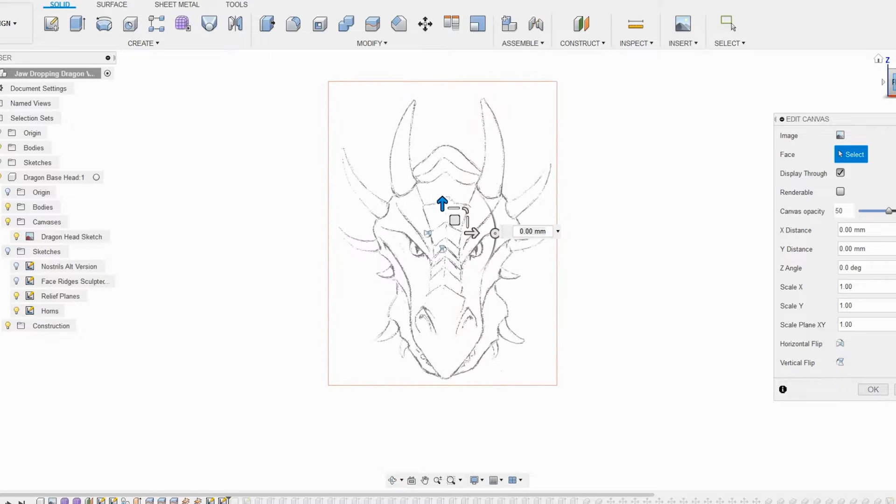First step in Fusion 360 is to import a scanned image. The sketch I created has been placed in the background, and then I can create the sketched lines on top of that. I'm going to be working with meshes, and here you can move around the points, the lines, the faces. I started out with a sphere for the face and just eyeballed the size, since everything can be adjusted from the initial body that's created.

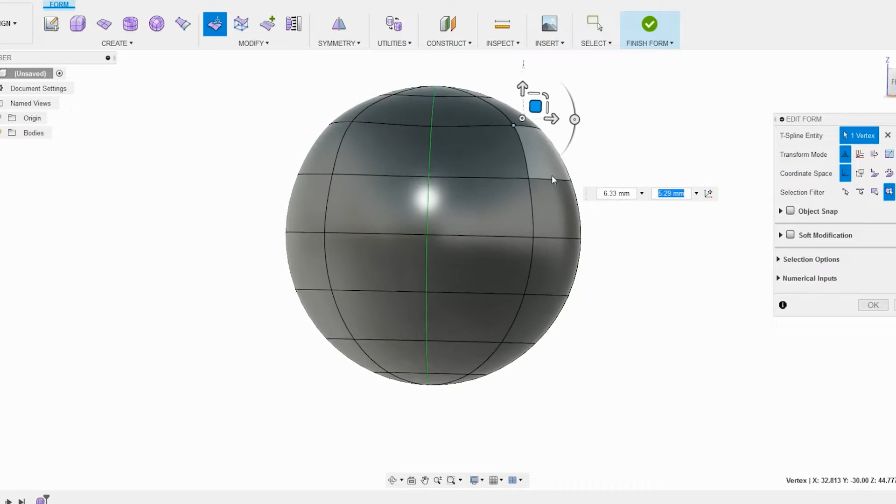For this I definitely turned on symmetry so I could work on both sides of the face at the same time. Ultimately I'm going to slice it in half and only use one of the halves, but it's easier to see how things are looking as you go if both sides of the face are being created at the same time.

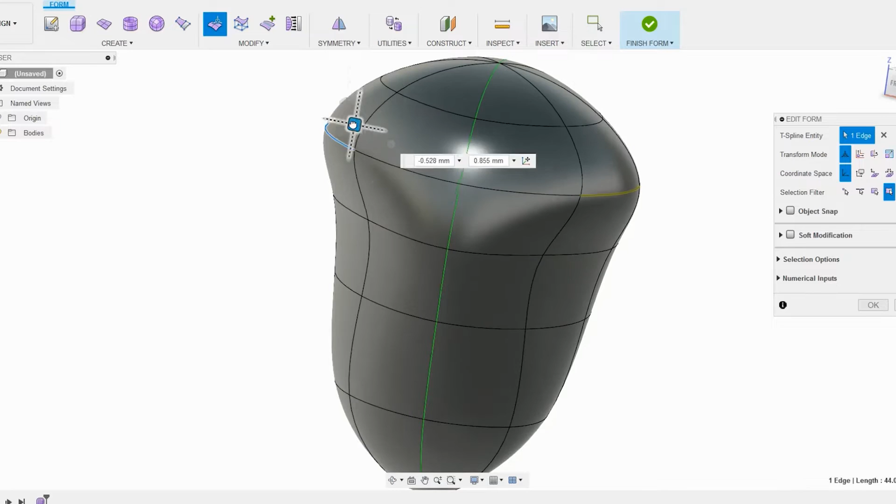It was just a lot of playing around with this, moving these around to try and get a shape that looked like it would work well for the dragon, and I did make changes to this quite a bit throughout the process as I was creating the slices that became the final face.

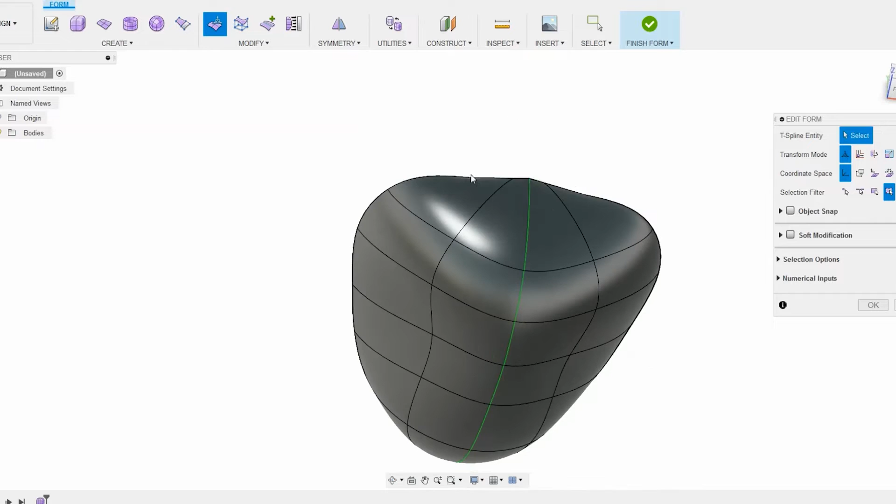I also sliced off the back of the sphere, so instead of working on the whole round object, I'm just working on a single face that contours around the front of the face. This is what my two surfaces ended up looking like approximately for the face and the jaw out of the form workspace, although I did go back and edit those multiple times.

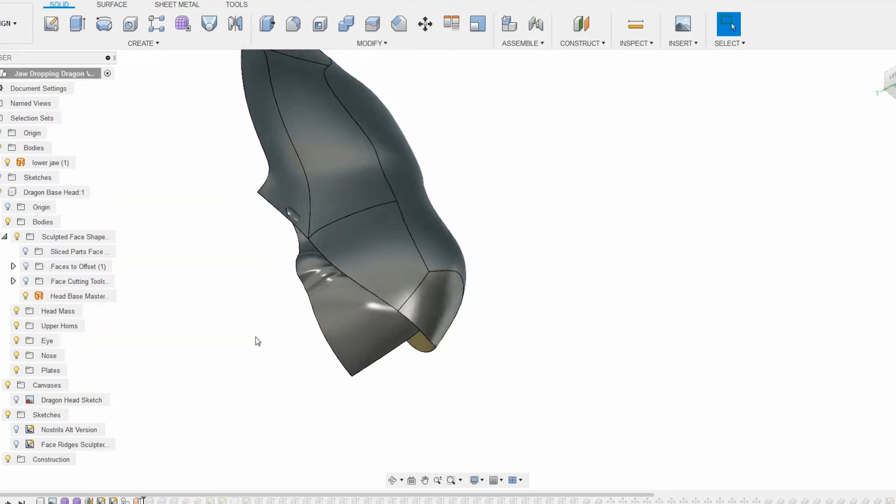Before we get too far, let's take a step back, because there are really three main processes that I used throughout this project. I think if we look at each of those individually, it will make more sense in the project as a whole. So the first method is sculpt and trim.

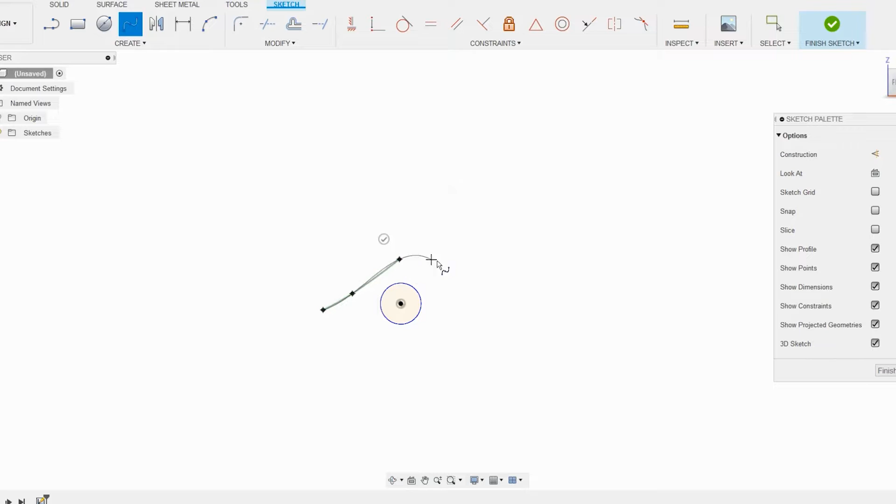This is what I used for the face and the jaw primarily. I'm going to go through a super simple sample project here so it's easier to see exactly what's going on. First, I'm going to create a sketch, and I'm just making a shape that's sort of an eye.

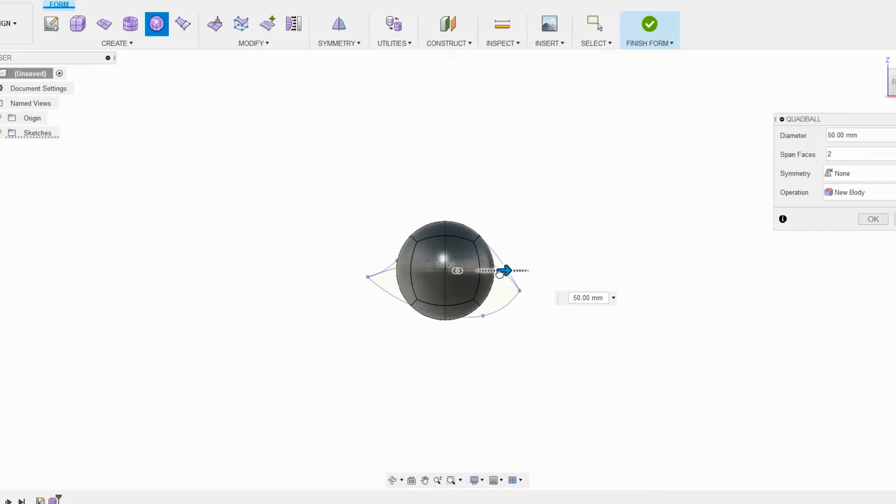It's just a sample here, but we want to have a couple of different parts that would be individual bodies, so we can create different levels from those using our sculpted form. I'm going to jump now into the form space, starting out with a sphere, and I'm just going to adjust that around until it covers my sketch, so my edges overlap somewhat.

And this is quite flexible. You can grab individual points, you can grab lines or the full edge that wraps around the shape, and you can also just grab it by a face and move it in any direction that you need.

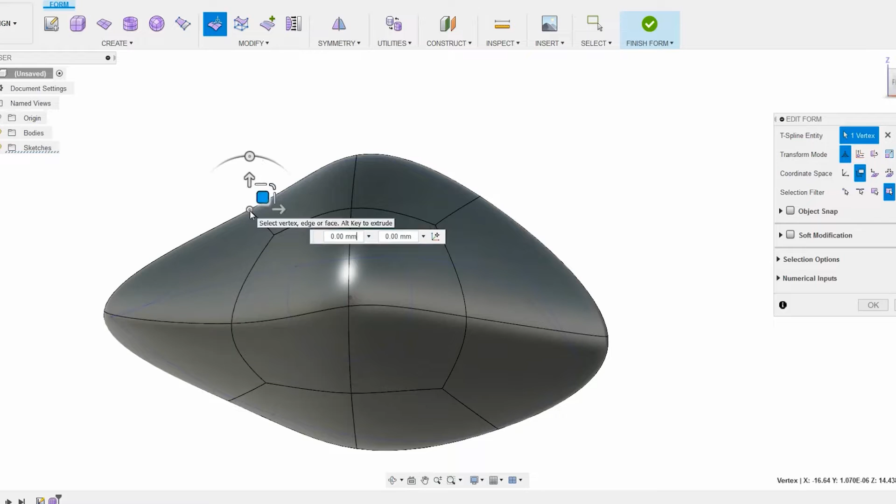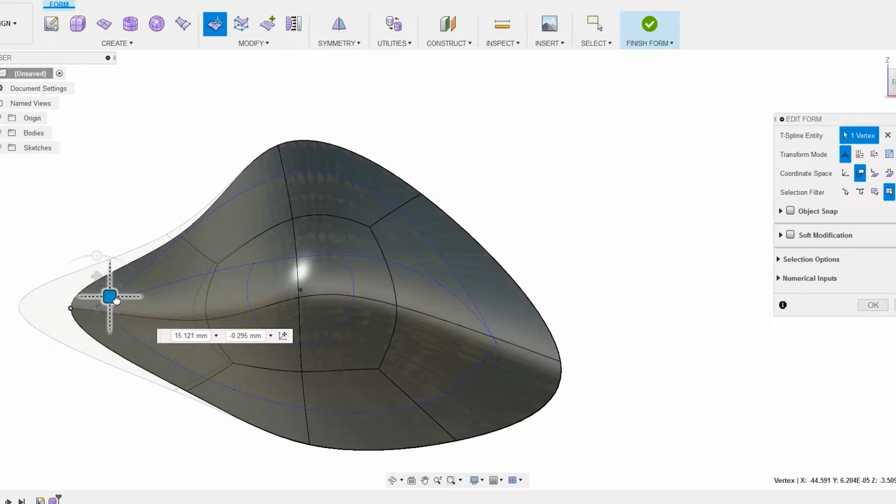I'm going to follow the same process that I used for the dragon face. So for this we're going to select the back faces and just delete those. That does change where the points are situated, so we need to go back in and move those points around a little bit. You can also modify your sketch as you do this.

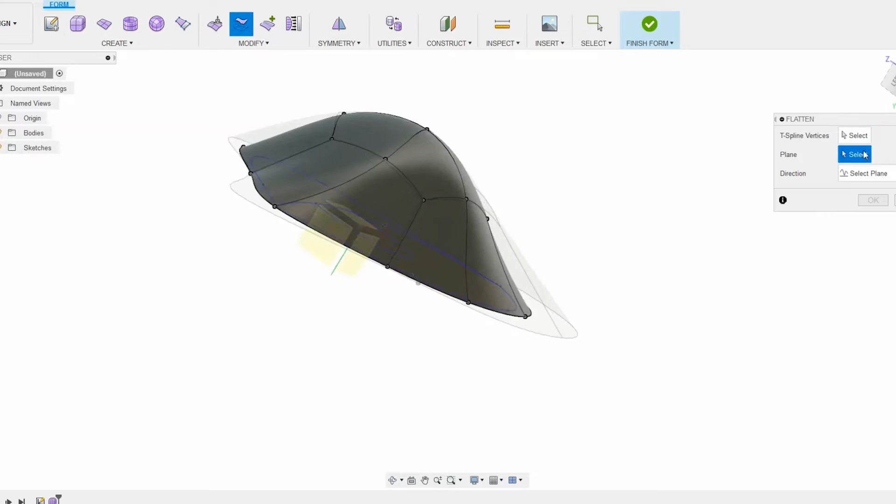You can go back and forth between the sketching workspace and the form workspace, you just have to re-enter it in your history timeline. When you go back into your sculpting form space after you've already finished the form, you can see there's a yellow shape of what it was the last time you exited.

So for making revisions, that can be helpful. You can see if you are making an edge more inward or further past, so it helps to direct those revisions somewhat.

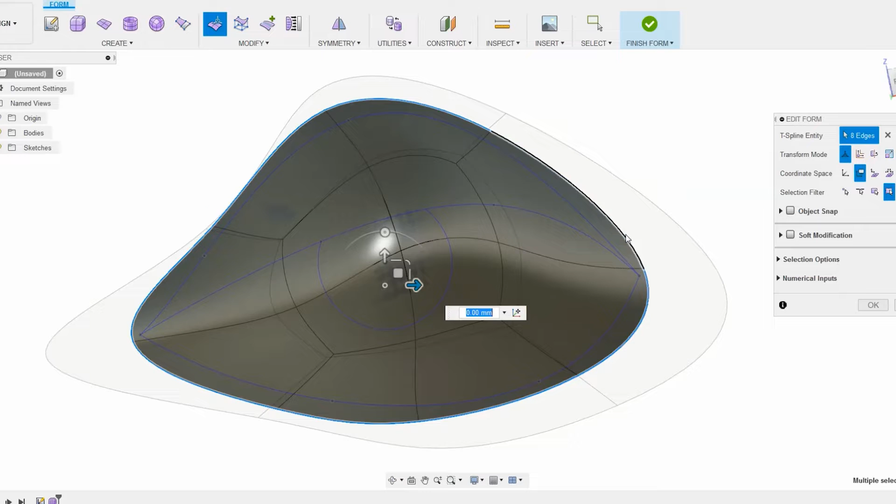After looking at the shape from all directions, we're just going to say I'm happy with that now. And we're going to use that sketch to extrude each of the shapes contained in the sketch. I want to extrude them as separate parts though, so I don't want them to be joined, I want to create a new body for each one.

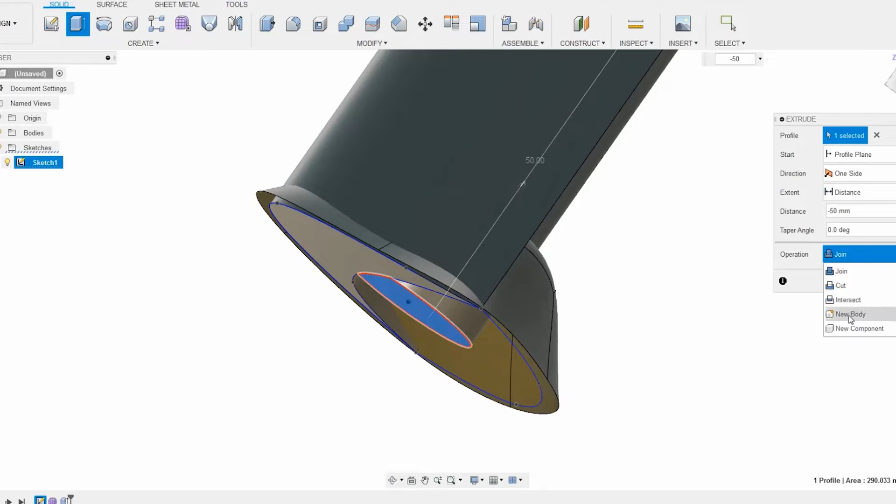Now I have 3 separate bodies. What I'm going to do is use the sculpted piece to trim each of these bodies, because obviously I have over-extruded these far past and they're all on the same level, but I want to use that contoured shape to contour the extruded parts.

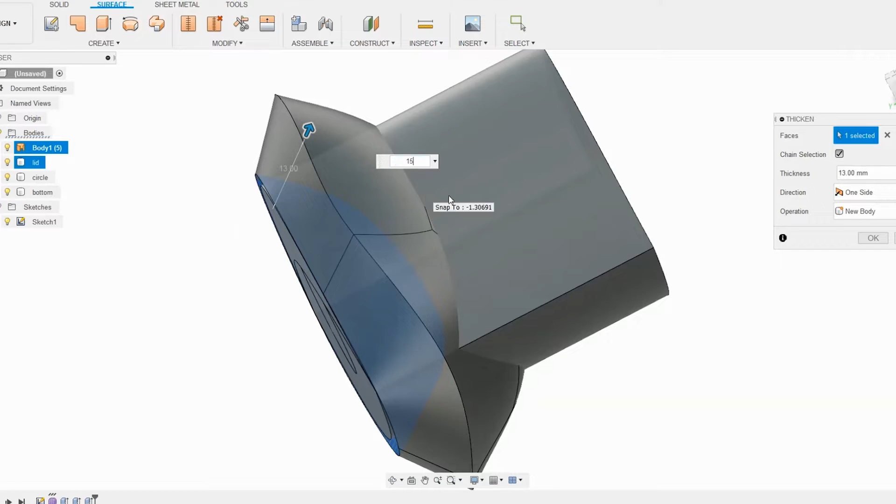To do this, there are multiple ways, but the way I used primarily was to select the sculpted shape, choose the thicken option, and you can thicken it out to wherever you want it to go, selecting the option to keep only the intersection of those two bodies, and anything above or below would be removed.

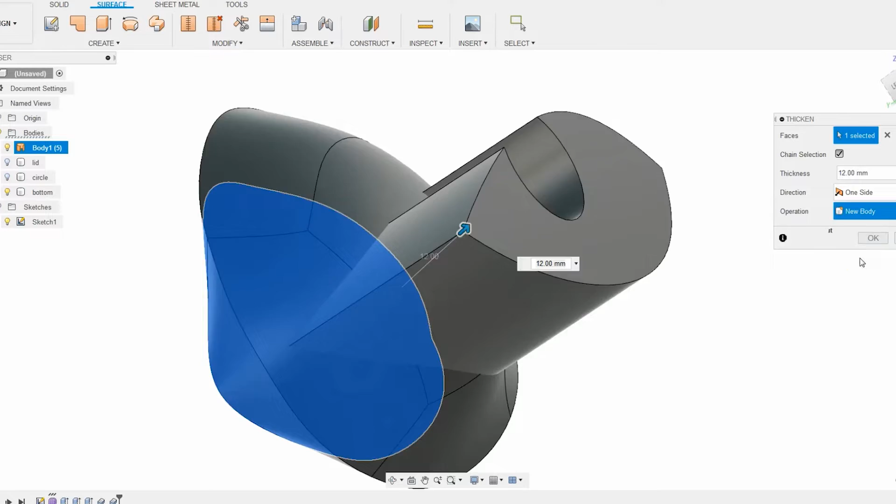The key here is to have it cutting only one shape at a time, so we can just turn off the other bodies and have it cut just the top, then the center, and then the outer piece, each at a different height. So then we end up with this multi-level shape.

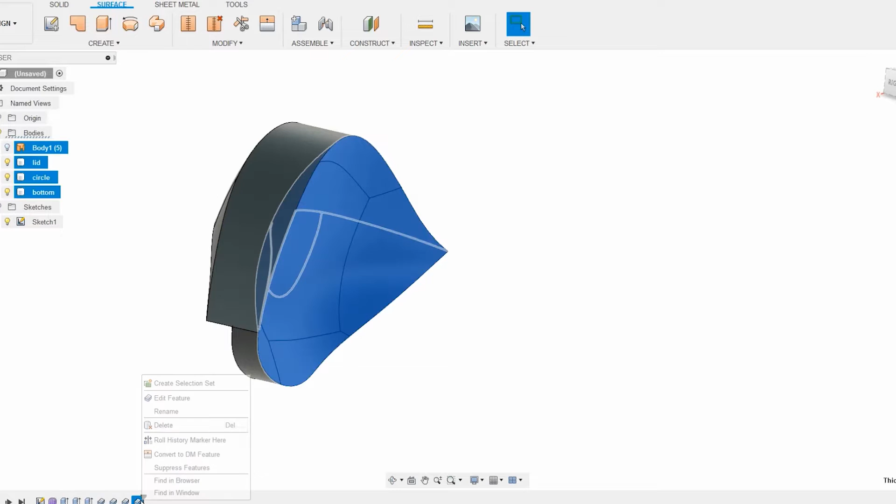That all has the same contour from the sculpted piece. I can also go back in with that same sculpted piece and trim away the back if I want it to not be as deep as it is right now. So we can just trim all of those back edges level further up, make it any thickness that we want.

And then you can go in after cutting everything, you can add fillets, whatever you need to do to further modify those pieces.

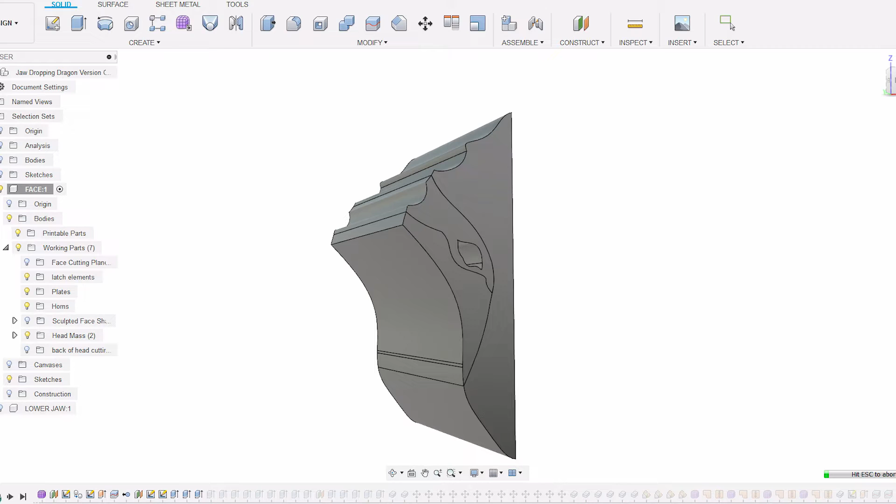Here's how that was applied to the dragon. So for the face, I created that overall sculpt. I extruded each of the sections in the face based on my original sketch. Then I cut each of those individually with the sculpted form.

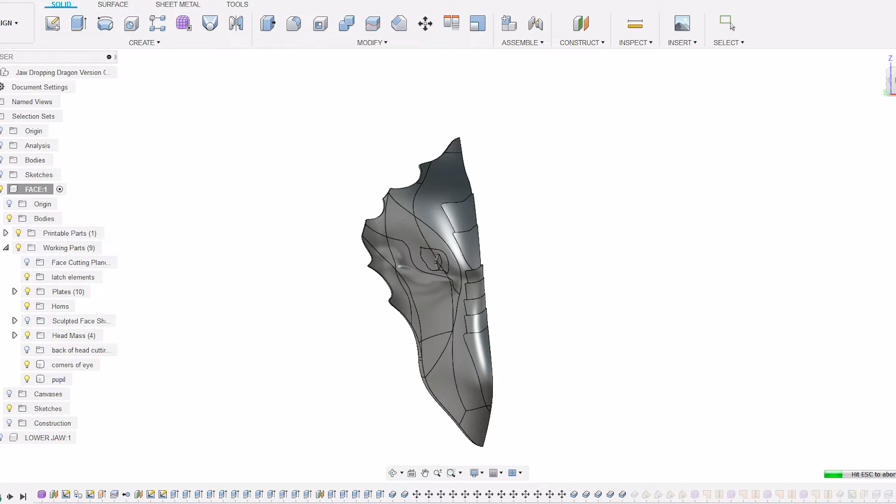For the scales that go down the nose, I also used the move tool to rotate those somewhat so that they would appear to be overlapping instead of all being on the same level, and then trimmed all of the face planes to whatever height was needed so they were each individual pieces, but everything has the same contour.

Moving on to method 2, sculpt to solid. In this case, we're going to be using the same idea of having a sketch that we're basing things on just to kind of get the sizes and layouts, and we're going to go into the form workspace again.

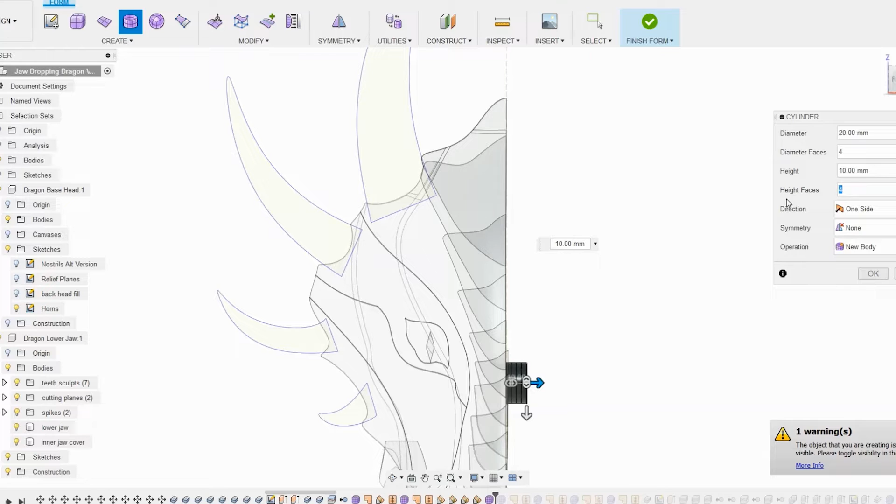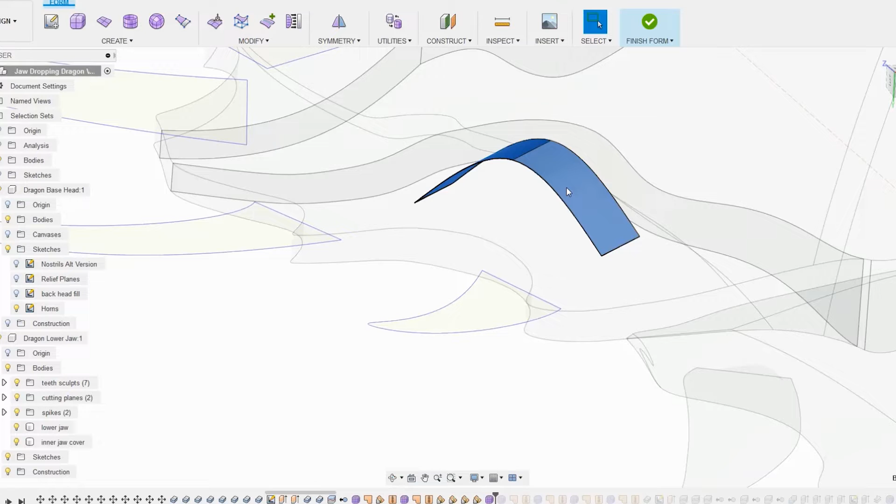So for this one, I'm going to do a horn on the dragon, and I'm starting out with a cylinder. This is open at both ends, and when you're doing this type of thing, it's best to use as few faces as possible when you're starting out, because you can always add more complexity to the geometry, but when you have more faces, that's more points to move, and your curves aren't going to be as even. So you want to just keep things as simple as possible and add more detail later on if needed.

So I took the cylinder and I sliced away the back. I have basically just 2 faces that already have a curve in them, and I'm going to begin to add additional faces to this by pulling them out while holding the Alt key.

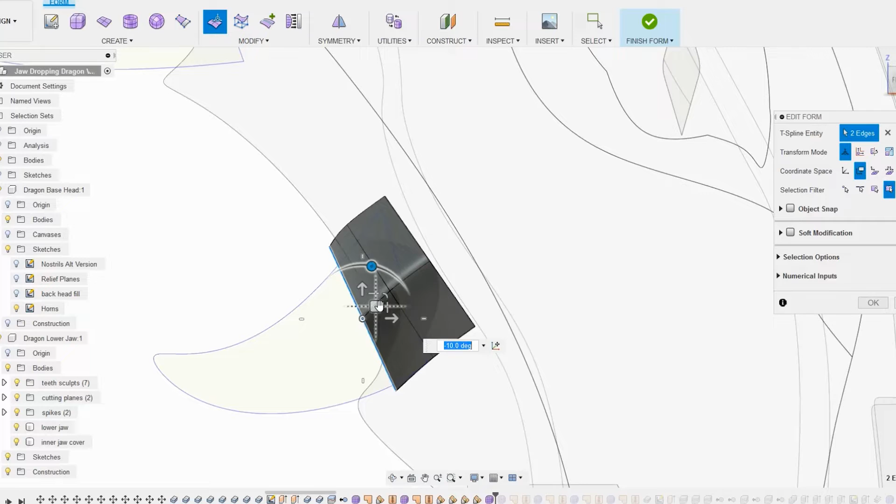Then I can change the angle and placement for each of those lines as it's created to follow the shape of my sketch. And this is not attaching to the sketch in any way, I'm just using the sketch as a reference in this case.

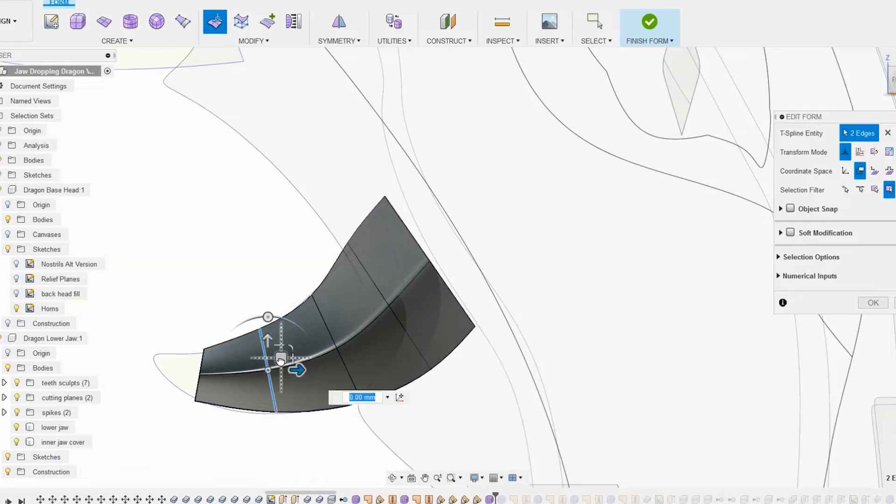I have locked my view so that I am moving the pieces only along one plane. So at this point they're staying flat against the plane, but as you're doing more complex shapes, you might be moving things past that plane.

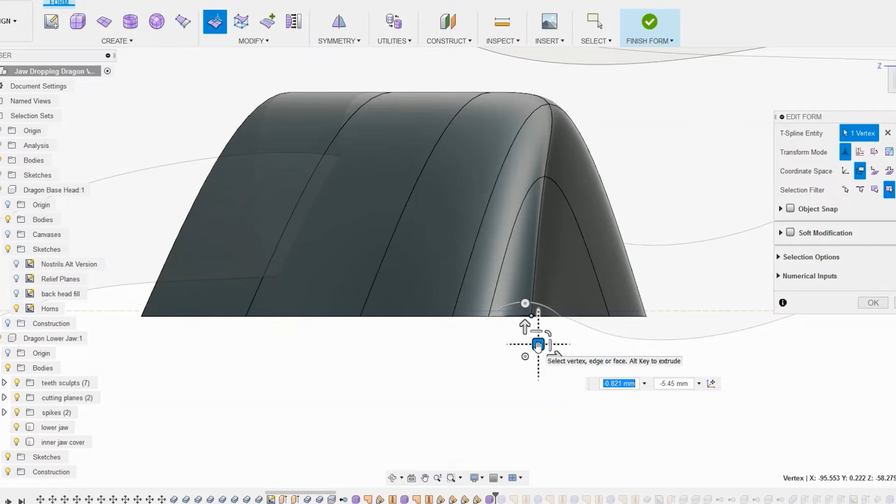If you do need to realign your points against a plane, you can do that easily using the flatten tool. For that, you just want to select the plane or surface that you want to align them to. You can also use the pull tool if you're wanting to align the points to something that isn't just a flat plane. Then you select the points that you want to be affected by the command, and they will all flatten out to whatever surface you've selected.

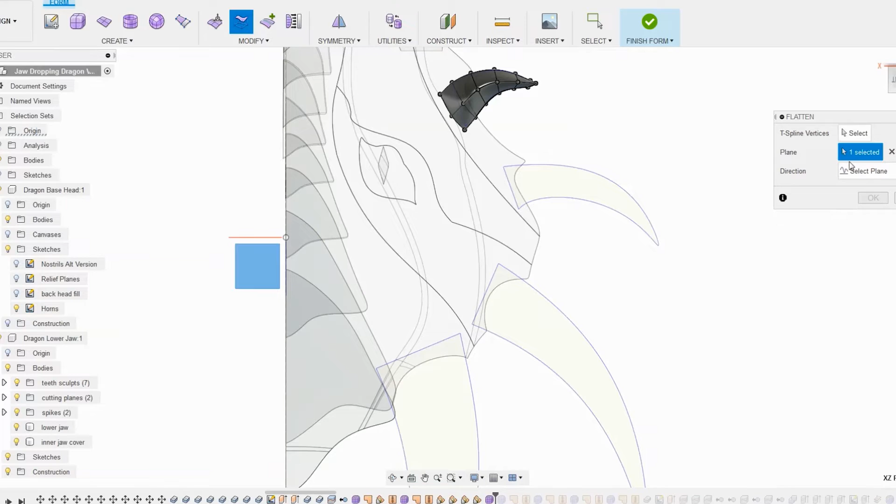In this case, I do want the backs to be flat since this is a piece that's going up against a wall. If you wanted it to be fully three-dimensional, you could just simply not delete the back faces, and this would then wrap all the way around.

You do have to watch it with where the points end up when you are creating something that comes to a point like this. When you try to go back to finishing the form, sometimes you'll run into errors, so you just have to be aware of that and fix things as they happen.

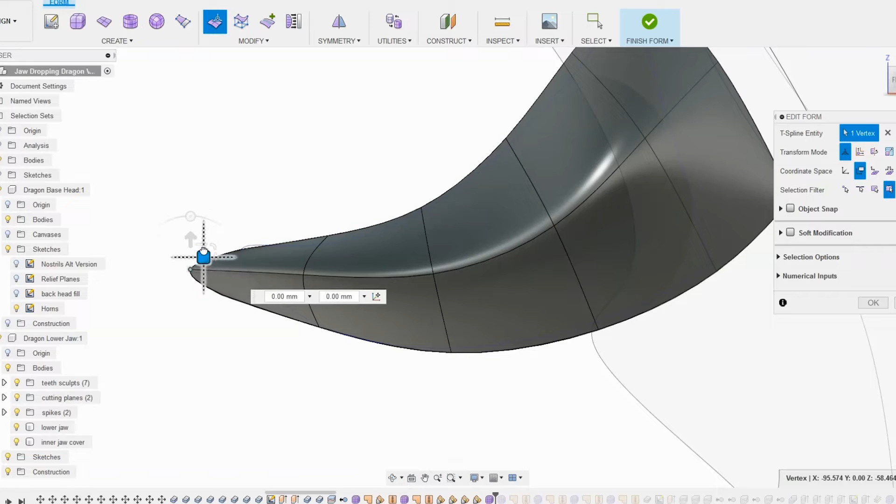So I'm happy with the shape now. I'm just going to hit finish form. So what I have right now is not a solid, it is just a surface. I want to make this a solid so it can be joined with other parts and so that it will 3D print.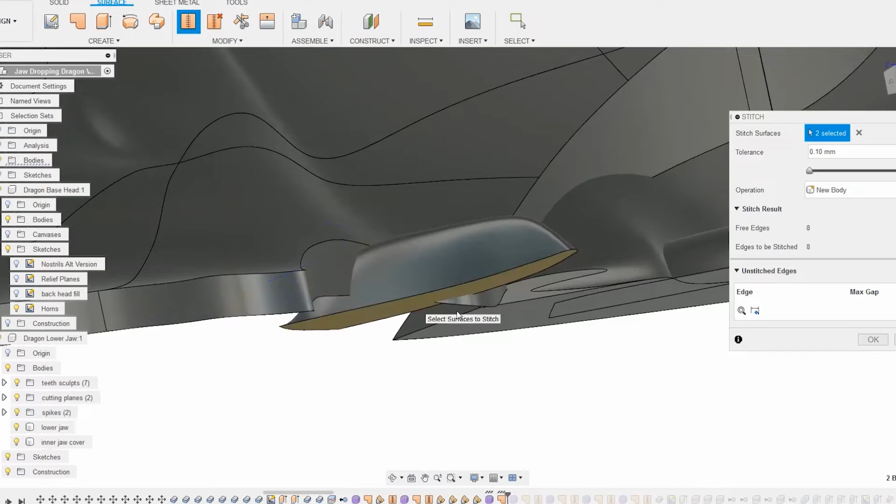So all I need to do is use the patch tool to fill in the back, then use the stitch tool to attach both of those pieces together. Then the surfaces do become a solid, which can be incorporated into the rest of the model. I used this process for all of the horns, but then I also followed a similar process for creating some added dimension in the eyebrow area and also for creating a rise and then recess in the nostril.

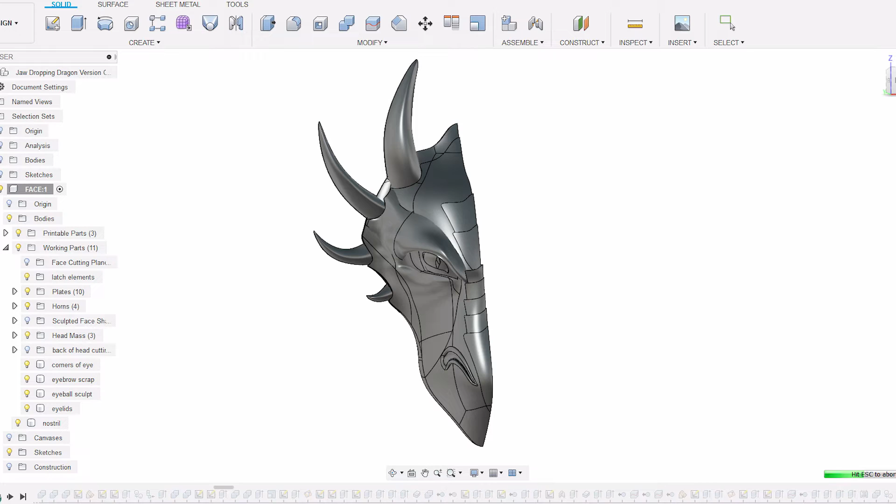I added eyelids this way and then just subtracted out portions using the extrude command after they had been turned solid. You can create any surface, turn it into a solid with the patch and stitch tools, then you can cut more pieces out of it to add complexity as you go. And in some cases, these bodies did extend past where I wanted them to go at the back of the face, so I just used my surface from the original face sculpt to trim away any excess.

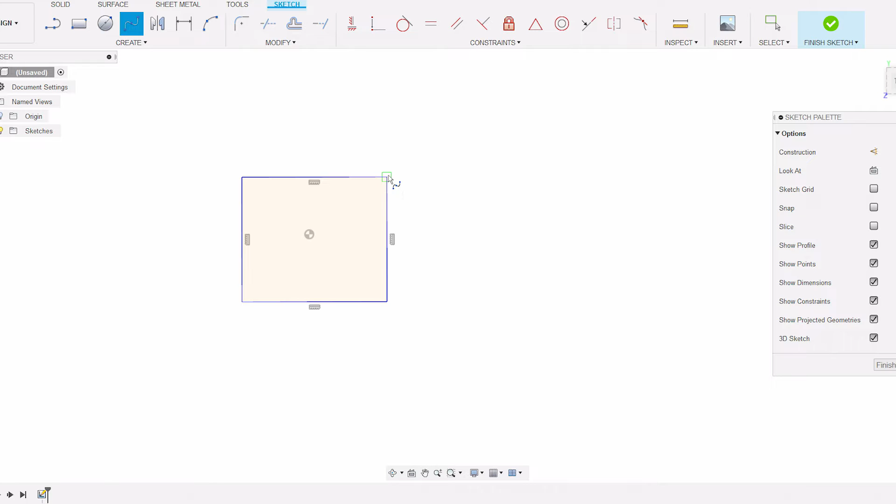The next way of creating things is the most basic. So you've probably done this many times if you've done any kind of 3D modeling software. That is sketch and extrude. This involves creating a sketch, and you can use a combination of straight lines, curves, whatever. You're just creating that profile. Then you can extrude those parts up individually, or you can use the same sketch to cut away parts.

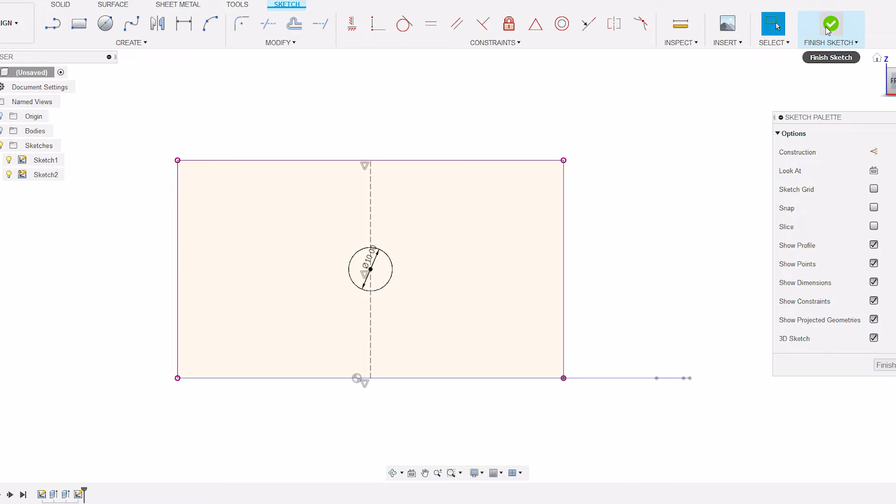You can then create additional sketches as needed on different faces and trim away more parts. In this case, I'm just going to add a screw hole into it. This is something that was used throughout the project. So again, you start with a simple sketch and then you can build on the complexity from there.

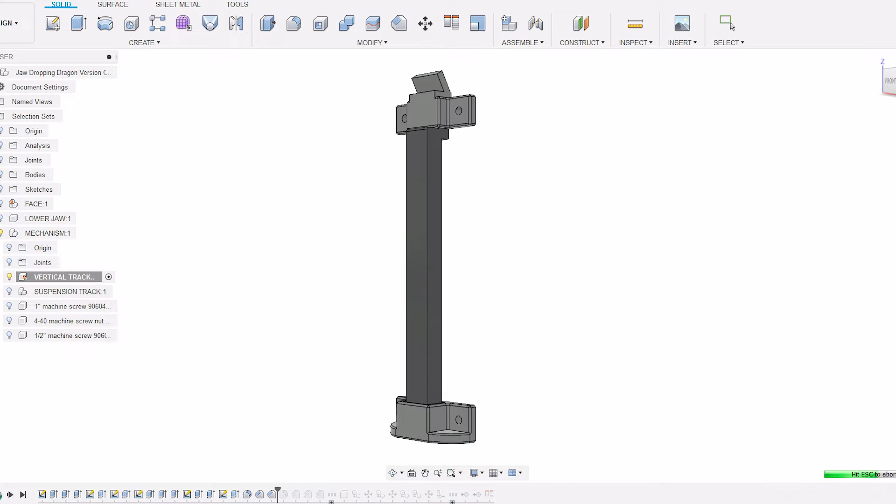This was the primary process used for creating the moving parts for the jaw, so it can go up and down. These are hidden behind the head, and they are just sketches that are extruded, and then the holes are extruded through and cut away. And then I've also added in some additional components just to represent the hardware. These are not modeled by me. These were from the McMaster-Carr library that's built into Fusion 360. This way you can see how everything goes together.

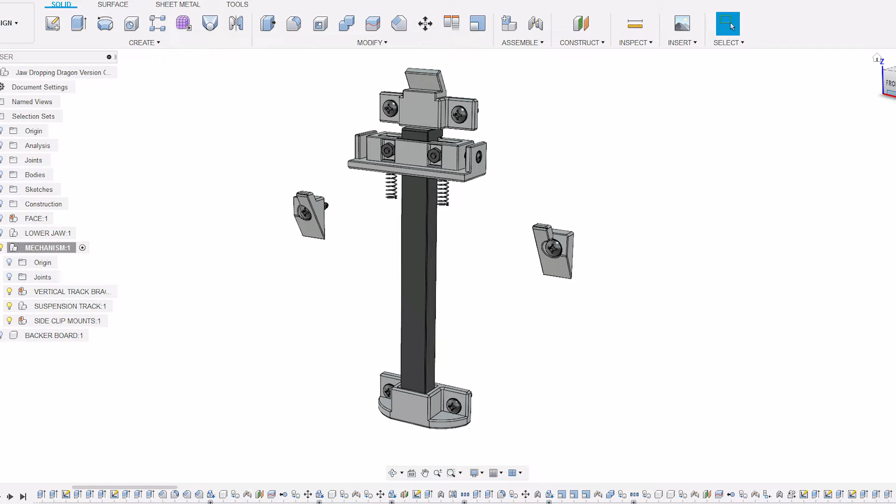We have some springs at the base to cushion the fall as the jaw moves down, and then we have different supports screwed into a backer board. Let's put all three of these methods together and see how the dragon was created. So we created a couple of different surfaces using the model environment, and then we used those to trim extrusions that were based on sketches.

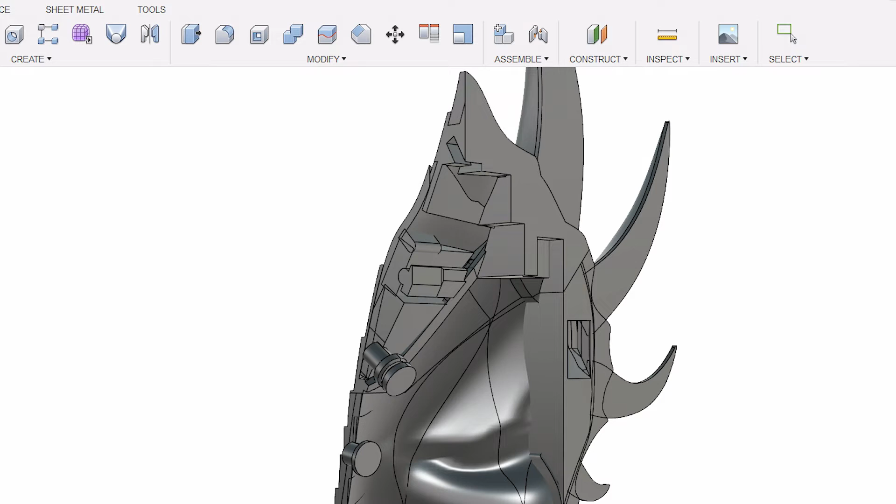Then I'm using a lot more of the sketch and extrude method at the back of the dragon, where there's a lot of mechanical parts that need to be able to move together, they need to be more precise, and they do not need to be those smooth curves that we want to have on the front. So we created horns, we created the lower jaw using all of these methods combined together, a mix of extrusions and sculpting and sweeping, and then just extruding holes through so that there's places for screws.

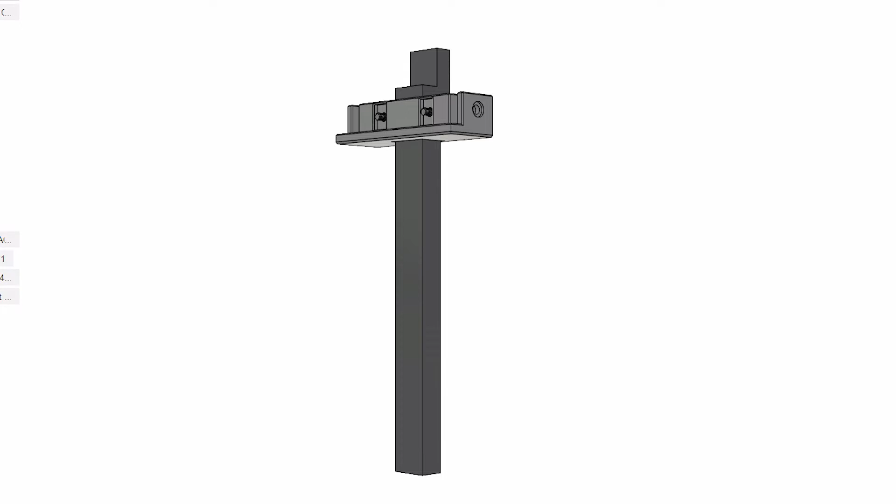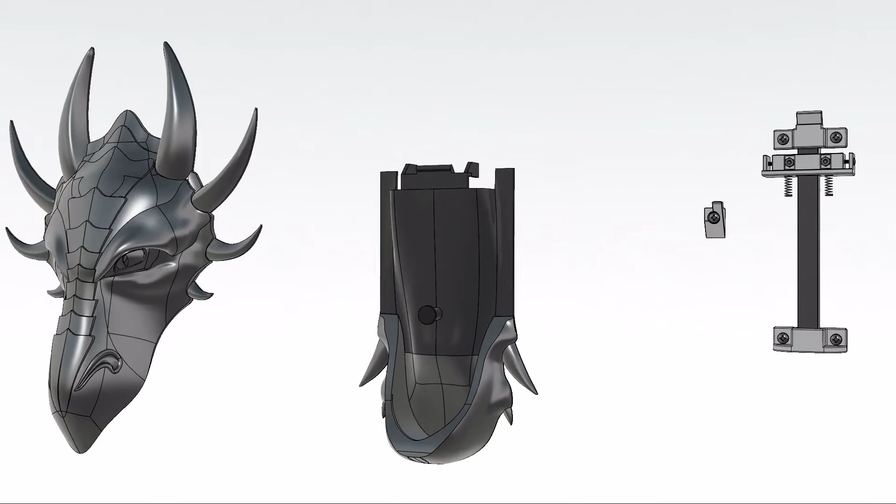And then all of these are made to fit together. Everything is based on sketches that might cross between different components so that we can ensure everything is aligned properly. Here we have the finished model with all of those elements combined together to create something fairly complex based on simple sketches. Now I'm going to go ahead and just add in some colors onto this, just change the appearance so it's easier to see the different shapes and just make sure everything is looking how I want it to.

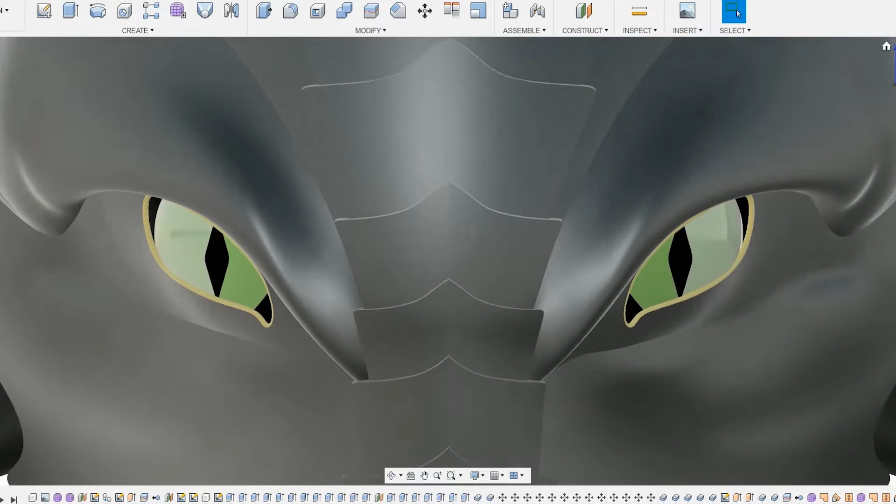This is just click and drag. Now you can drag it onto an entire body or component, or you can just drag a color onto a face if you want to change parts of a body or component. With some contrast now with the different colors, it's just easier to see how this is generally going to look once it's finished.

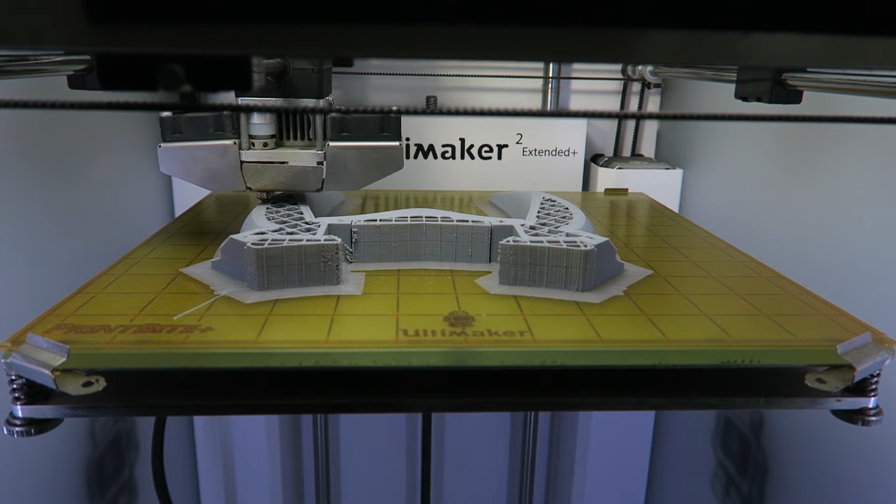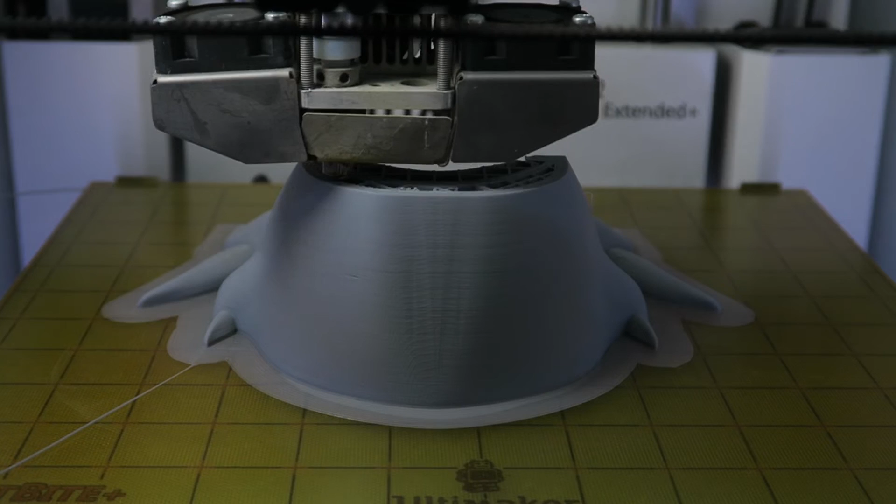I'm ready to print everything out, so I saved all of my files into bite-sized chunks that would fit nicely on the printer and fit together as best as possible in the gluing and attaching stage. I used a couple of different filaments for this, some Amazon Basics PETG for the really large parts, which were printed at 0.1 resolution, and then the mechanical parts and the face that have more detail and need to have really good layer bonding.

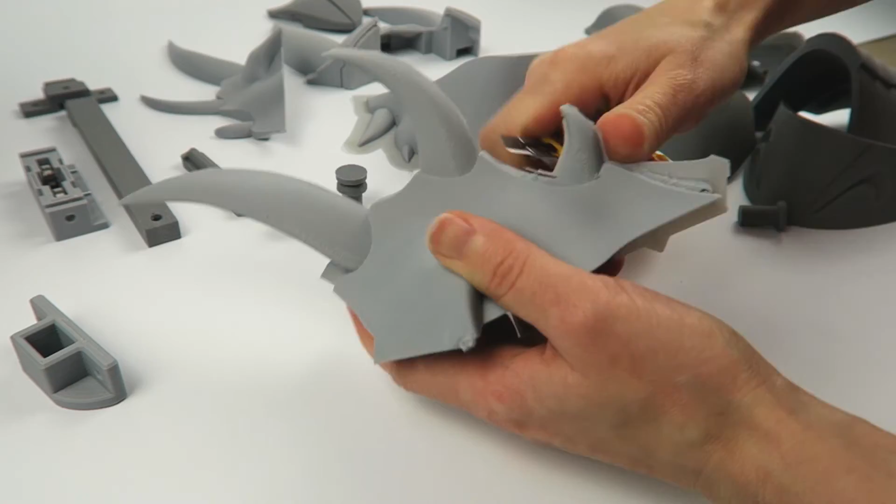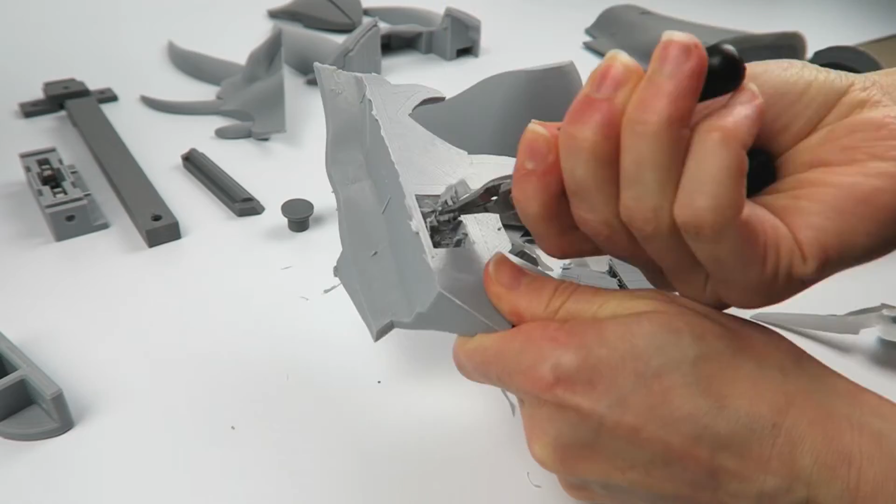Those I did in matte fiber HTPLA from Protopasta. There's of course cleanup to do and everything. I used a lot of brims just because these were reasonably large parts that I wanted to keep nice and flat, and the Amazon PETG did want to warp just a tiny bit, but it was okay. Then the supports were a bit too well attached in a few spots, but not terrible. I was able to get them all out. All the supports were at the back, so it only matters that the parts can still fit together, they don't have to be beautiful.

The lower jaw piece was the most difficult. The supports were really stuck on there, and then I had created an area that was very difficult to get to. With the lower lip, there is an actual lip there too, so that any small items placed into the dish won't just fall out, but that did make removing the support structure rather difficult. So I did get it out in the end, but it took a couple of different pairs of pliers and some time. There are plenty of areas at the back that need to be cleaned up, but that are going to have the scale that releases the lever. Everything needs to fit together.

A lot of the tolerances and clearances are really tight on this because I am intending to sand everything to an absolutely perfect fit so that the parts slide smoothly together. If I have too much clearance and then I sand them smooth, then there's going to be too much of a gap and they're not going to lock in properly. So in this case, I've opted to keep my tolerances minimal and then just tweak them after the fact.

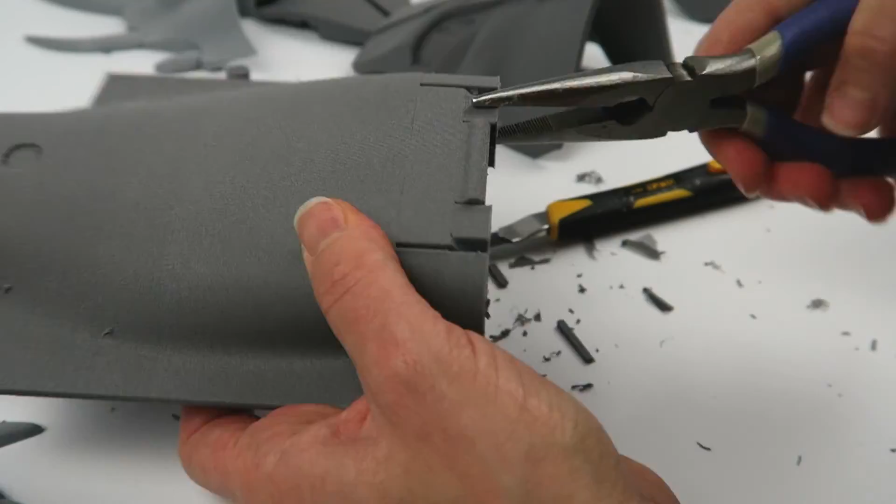On the top part of the lower jaw back, there were some areas that built-in supports on Cura weren't working too well with, so I created some custom supports so that I could print this vertically. However, I didn't quite have those calibrated properly. I had some errors in my sketch, so I ended up breaking a piece off by mistake because it was thoroughly joined instead of popping out.

This particular filament does glue quite well because it has matte fibers worked into the filament, so I just attached that back with some super glue, or I could also just reprint it if that doesn't end up holding. However, that particular piece is not particularly load bearing.

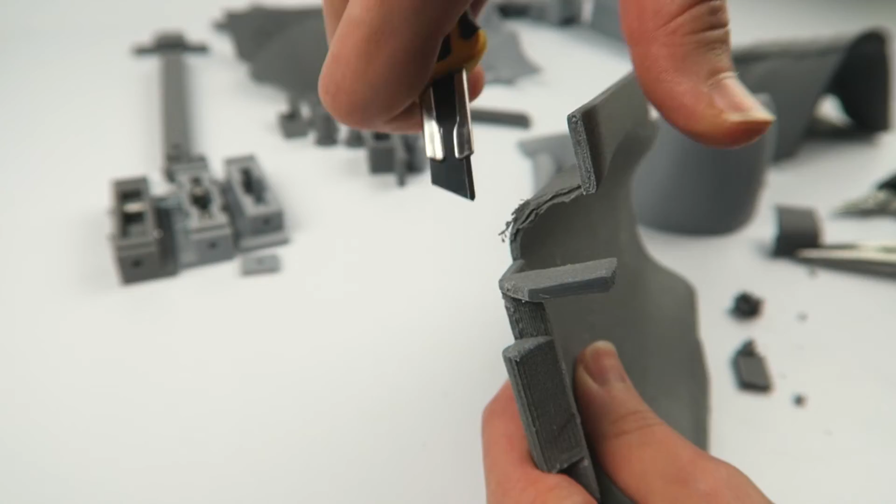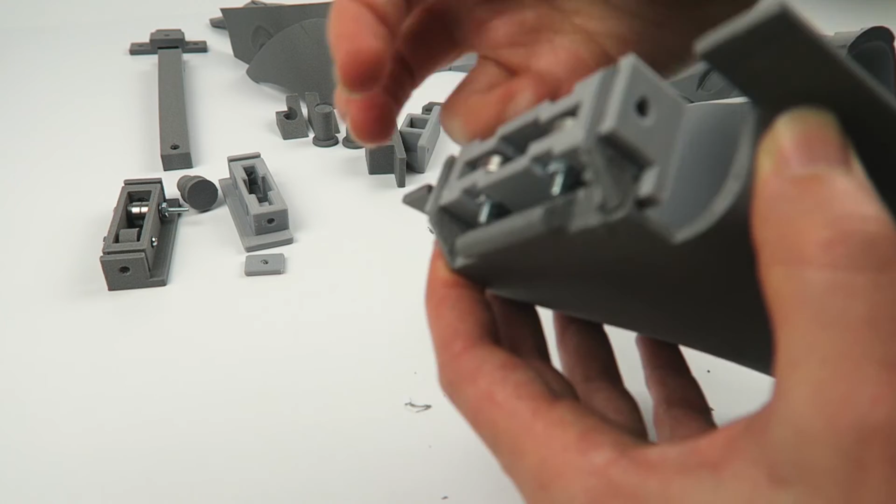I used a Dremel to pre-trim some of the areas where the supports were overly attached. Then this is how these pieces are supposed to fit together once that piece is glued back on. I did also notice one other issue with this part, which is that it is missing the screw hole through these panels that fit into the slots, so I need to go back into the model and fix that.

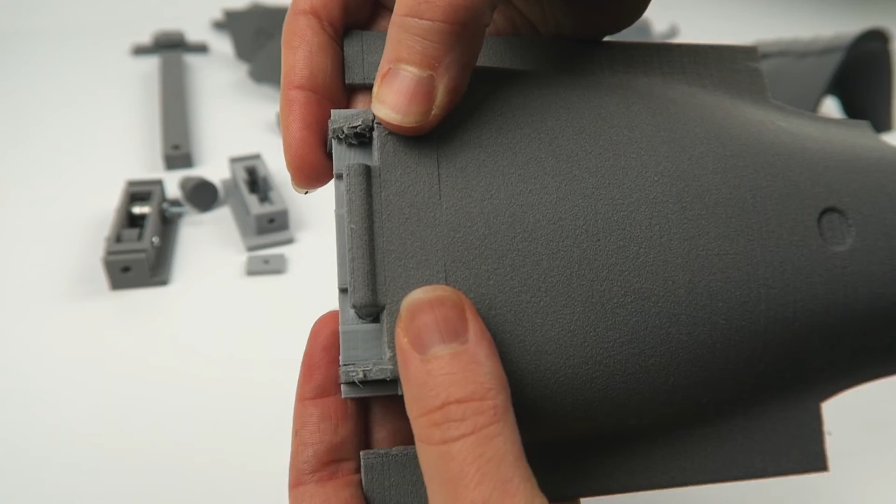For this particular part, I'm probably going to just use a drill to add the holes in, but for future prints, I want to have any corrections made. Then for the lower jaw, you can see I did end up getting all of the supports out. It's a little bit rough in there, so possibly it could be modified in the model, but I think that actually it's going to be okay. We'll see how it cleans up. And that's how those two parts will ultimately attach together.

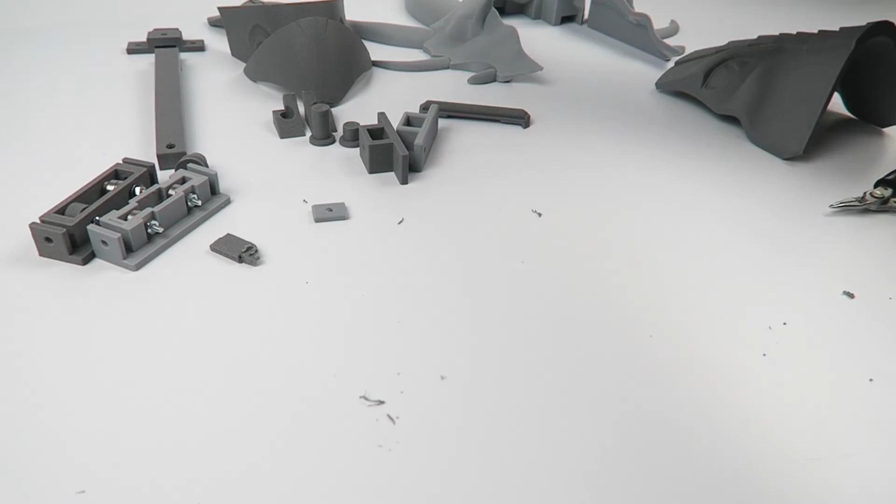The face was printed in multiple parts that fit together nicely, and the supports came out quite well in that, but I did find one other error in my model here where there was a combine error. There was an extra tab that I have just cut off, and then I have also fixed that in the original model so that for future prints that won't need to be done.

This model is printed in quite a few different pieces. I opted to go with smaller parts that I knew I would be able to glue together just fine, just so that I would have the simplest, cleanest prints. This latch piece is going to fit onto the horizontal cross piece there, but it's very difficult to see if anything's really going to work properly until it is assembled.

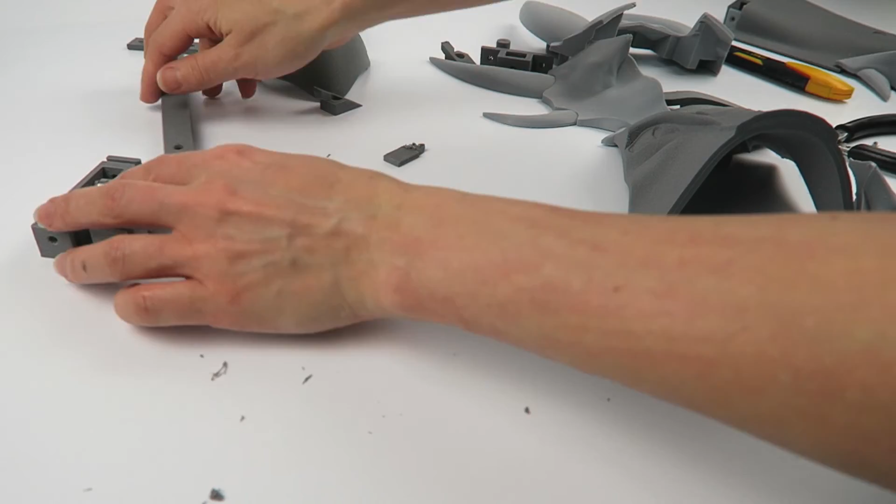The horizontal track, I've gone through a couple of different versions of that. I started out just using a wheel, and then I realized that a bearing would be a better idea. The track is rather tight right now because this has not been sanded yet, but I will be able to fine-tune that to slide just right and hopefully be tight enough with the bearings so that it doesn't just completely fall, and then the springs at the bottom should cushion that fall also.

So a couple of these pieces do need to be reprinted based on revisions and just depending on which filament they're working best. For example, I printed the horizontal track with the PETG, but the layer bonding was not super great, and one of the pieces broke off while I was just trying to cut off some strings. So I'm going to print that one in the matte fiber HTPLA. Let's jump back in the model and make those revisions based on what we've seen with the finished parts.

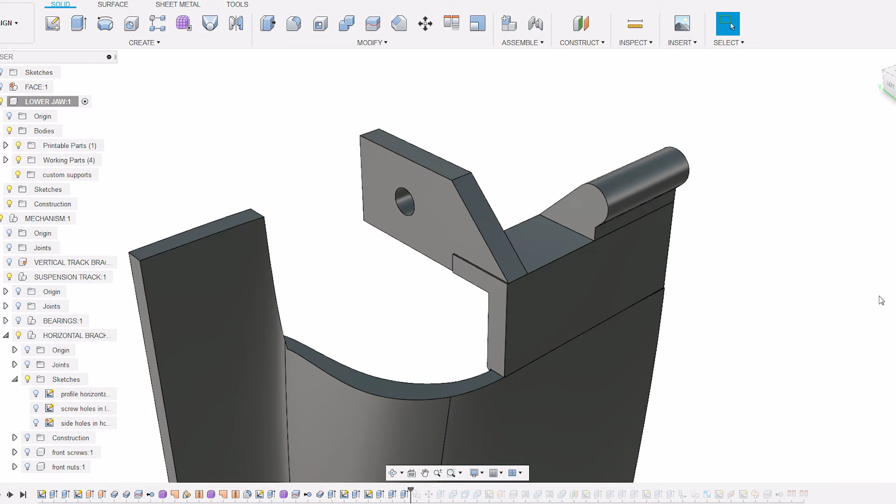So for the lower jaw piece there, we're going to use the sketch that was there. It just was not extruded through this part. Simply extrude that back in the timeline so that you are further back in history, and then once you move forward again, that modification will be copied to any future parts. So when this is mirrored, the hole will also be on the other side.

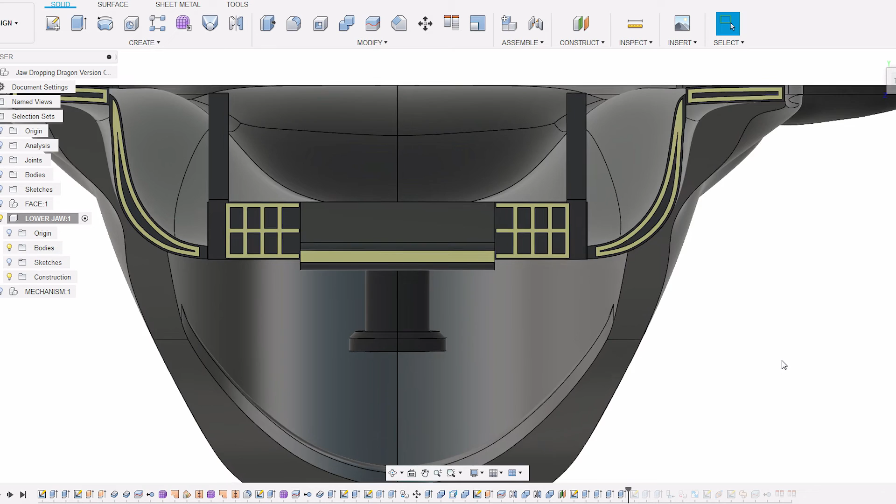Changing the custom supports is a little bit more complicated than adding the hole was. So when I look at this in a top orthographic view, I can see that there's definitely an error there. It is overlapping instead of being offset. Perhaps the wrong line was projected or something was offset in the wrong direction. So I'm going to just grab the correct line and project that so I can see what I'm doing.

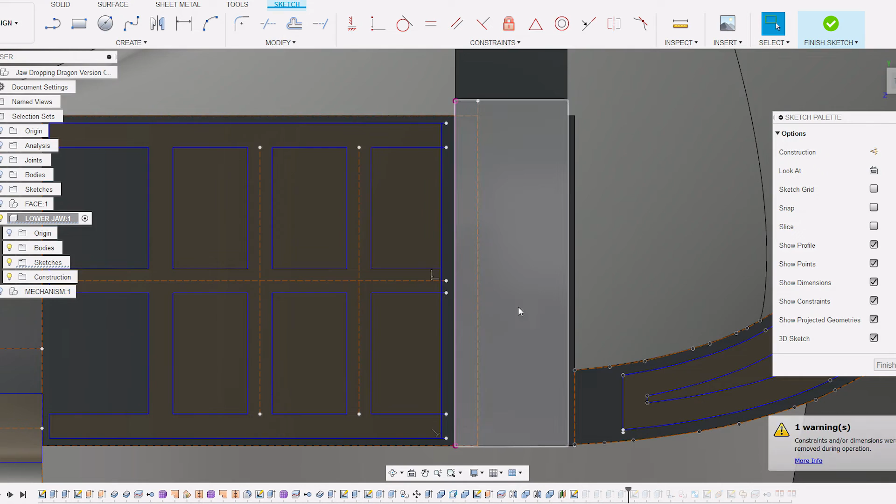And I'm just going to trim that further back so this piece is not right up against that part. I'm just going to cut away any excess lines there, and now we do have a gap that should allow the part to be removed more easily.

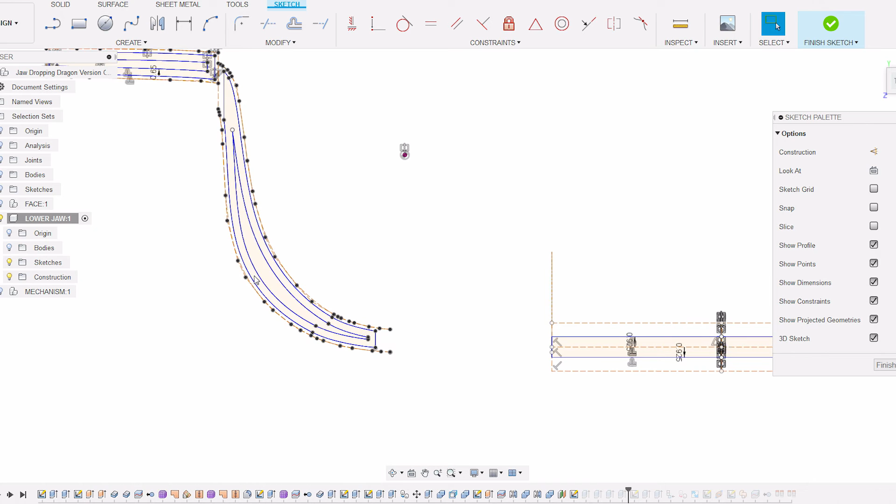Same thing for the rounded piece. It was connecting a bit too close over here, so we're going to just trim away the point. I don't want to trim away too much because I do want it to print cleanly, but just enough so it's a bit easier to remove it from the finished part. Then we're just going to delete the other parts and go ahead and mirror the new parts, and that way the changes will be copied to both sides.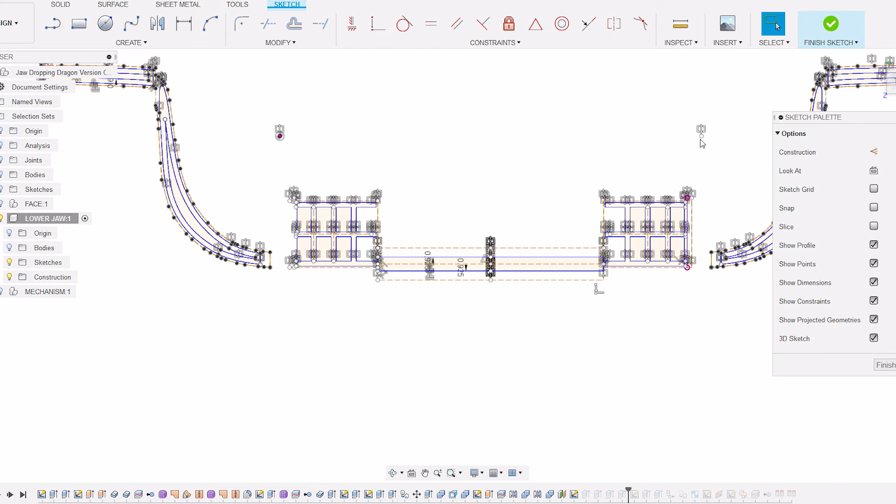When you go back in your history and make changes to something like this, to a sketch, it's very likely that it's going to cause some sort of errors, or just things aren't going to look quite the same way as they were supposed to. So in this case, the parts on the left side didn't extrude because I changed the sketch and they now were classified as new bodies, so they weren't included in that extrude.

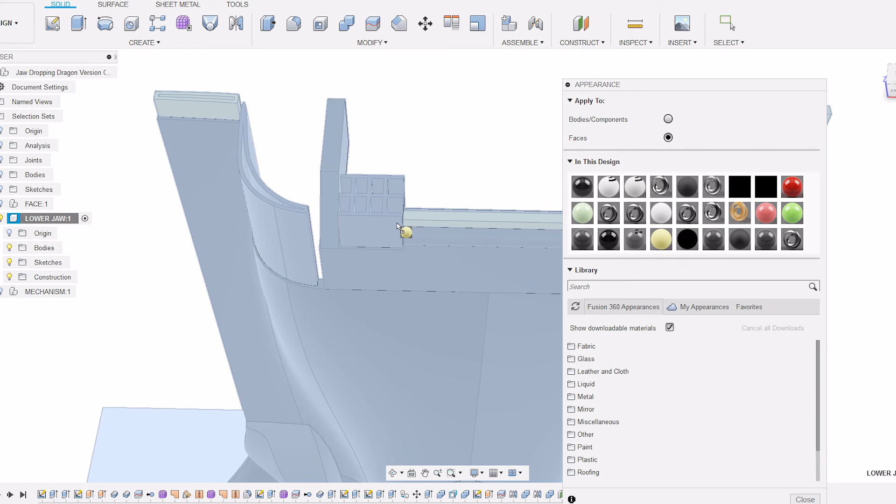So all I need to do is right click on each of those actions that needs to be revised, select the new sketch profiles, and then those will be included in the extrudes. Just copied my appearance over there so everything is clear as to what's a support structure and what is a final part. There is another piece to each of these supports.

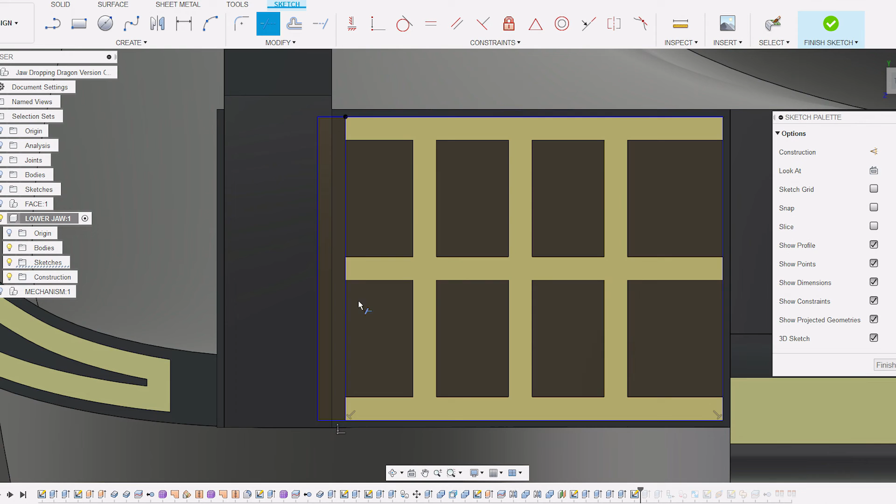I had added a small plate at the bottom just so there's a couple of solid layers to ensure that the slicer is picking up these thin lines. So same thing there, all I needed to do was go back into the extrude, select the sketch profiles as they are now, and then those are included in the extrude commands.

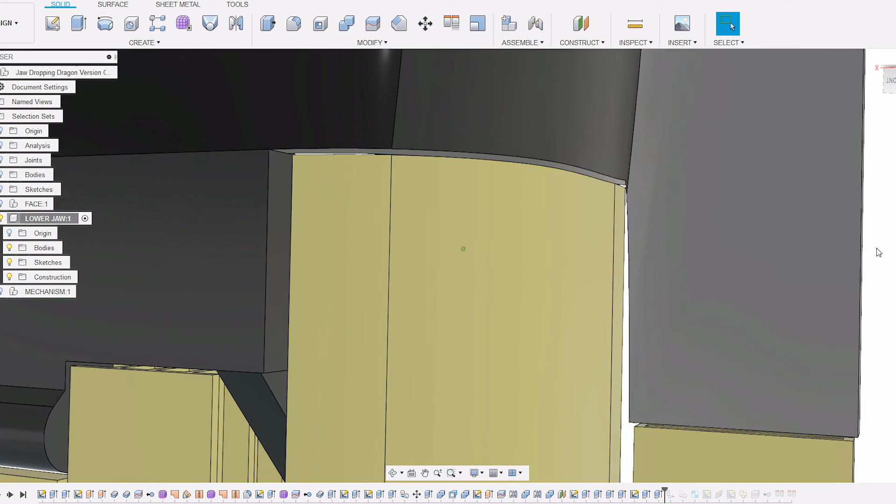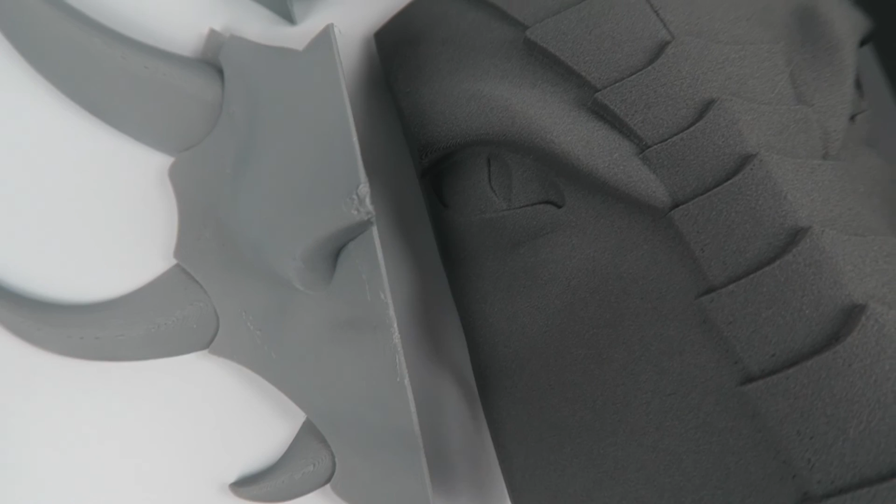So I've made multiple changes in this way, just going back in my history. That's the great thing about having this history, is you can change your mind as you go or fix errors. You just have to keep checking your timeline and ensure that any changes you're making aren't breaking the model or causing anything to not work the way it was supposed to. It's difficult to tell at this point if everything is going to work together properly now and if the mechanism is going to function as it's intended.

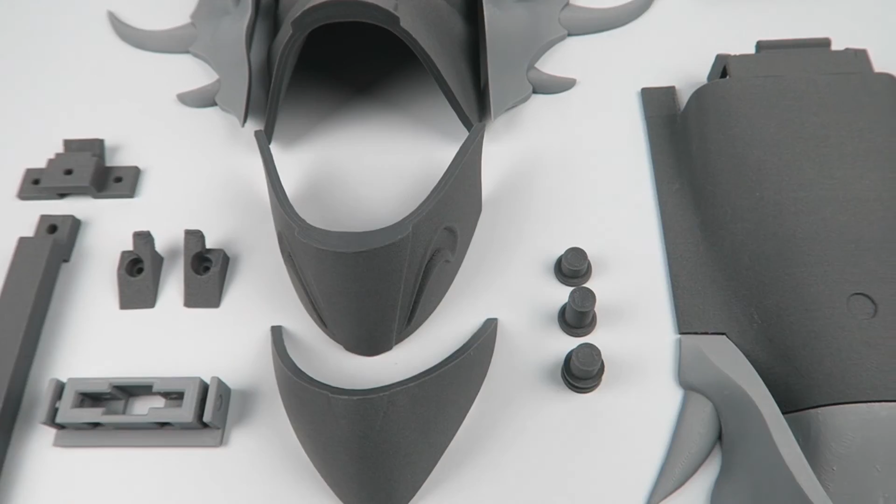So as I move forward with assembly, I very well may need to go back into the history again, make changes, reprint parts. No big deal, because we do have that ability to make changes that will then update throughout the model. So next time I'm going to be doing the assembly, the filling, sanding, all that, and then finishing. So I'll be working on that in the next video for this series.